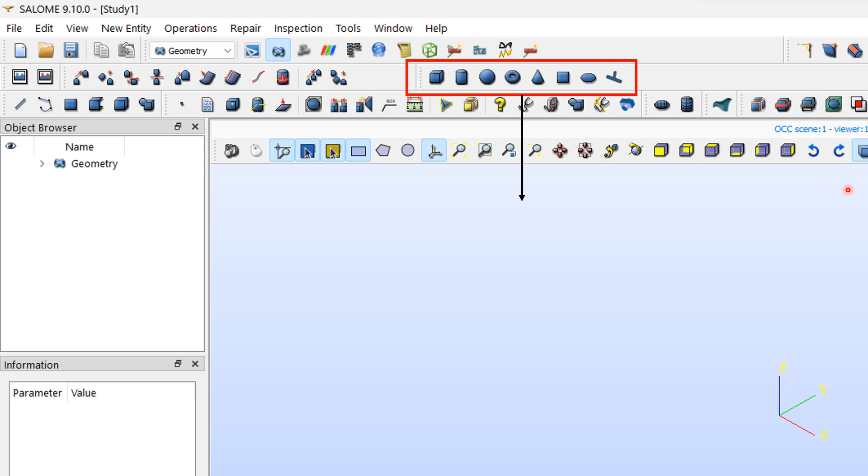You can also select primitives from the primitives toolbar, which is usually located at the top of the geometry module. So, from the primitives toolbar, I will select the first tool, box. Clicking on it will open the box property panel. We have two algorithms to create a box. Here I will select the first one.

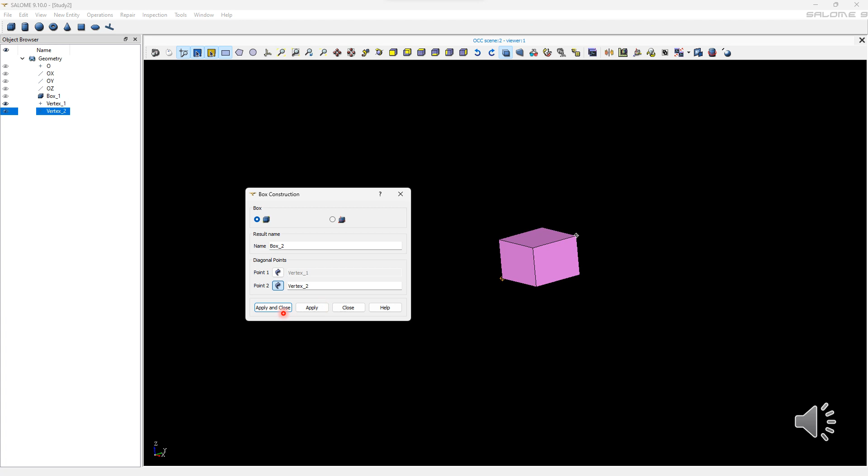In the first algorithm, a box can be created by selecting 2 points. For point 1, I will select this vertex from the view, and for point 2, I will select this vertex from the view. By default, by selecting the points, the box is created. We need to select diagonal points, and now click the apply and close button, and you can see that the box is created.

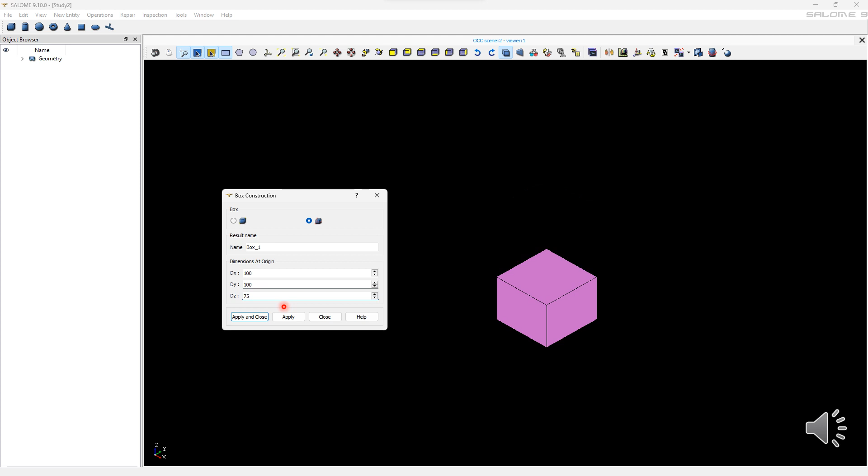In this case, I will select algorithm 2. In this algorithm, we need to define distances in x, y and z direction to create the box. By default, the box is created with the distances 200. Now I will set the x distance to 100, y distance to 100 and z distance to 75, and click this apply button to save the changes.

The next one is cylinder, and to create a cylinder we have two algorithms. In the first algorithm we need to select a base point, and we have the option to set the angle as well. Here I have selected the base point from the object browser, and I'll select OZ vector and click this apply button, and with the radius of 100 and the height of 300, the cylinder is created.

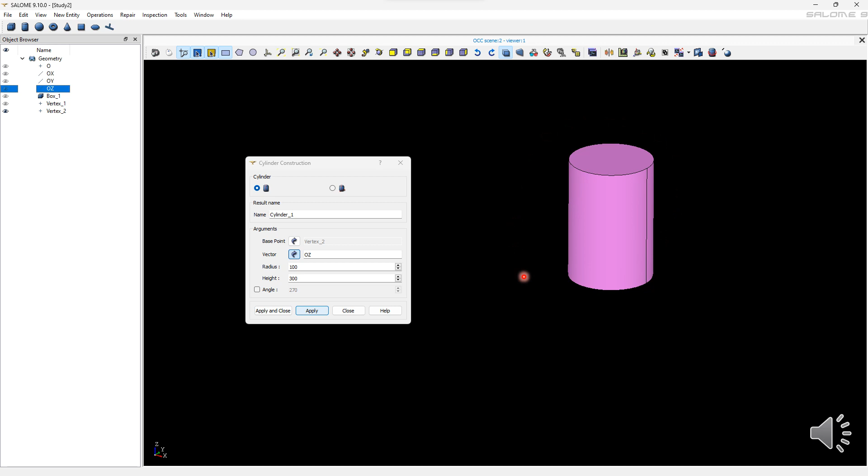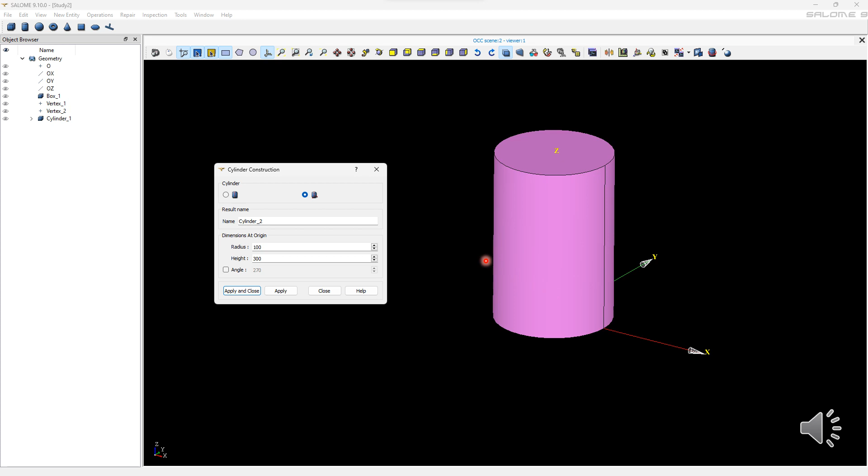In this case, we have the trihedron. The base point is taken as the trihedron; I mean, the cylinder base point will be the origin of the trihedron. So dimensions are taken from the trihedron. I'll set the angle to 270 in this case and click this apply button, and you can see that the cylinder is created with an angle.

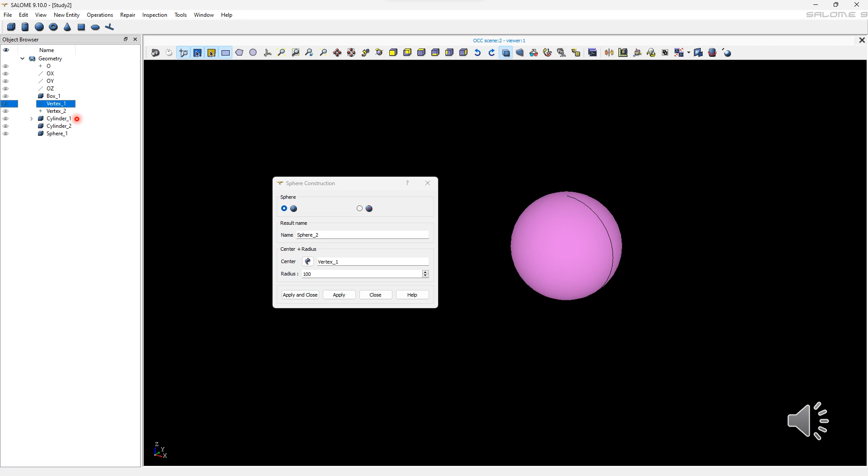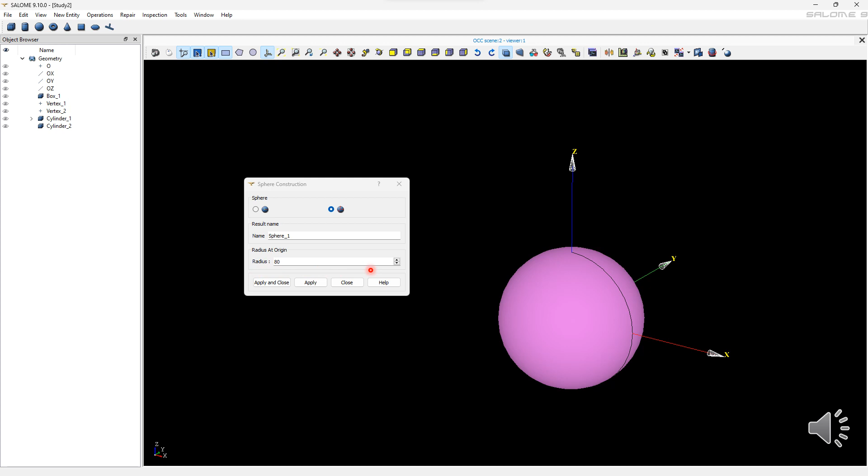The next one is sphere, and to create a sphere we have two algorithms. As usual we need to select the center point; here I'll select it from the object browser and click this apply and close button, and you can see the sphere is created. In the second algorithm, the sphere will be created at the origin. I will set the radius to 80 and click the apply button, and the sphere is created.

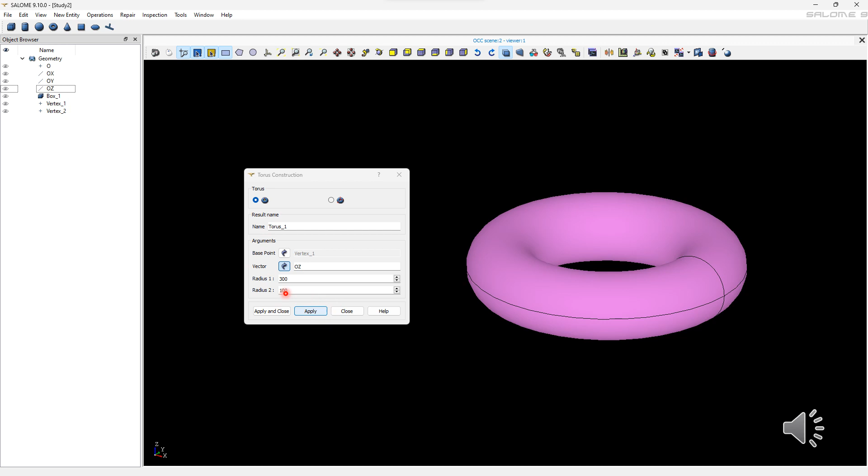The next one is torus, and to create a torus we have two algorithms. In the first algorithm we need to select a base point and vector and set radius 1 and radius 2. For the base point, I have selected vertex 1 from the object browser, and I set OZ vector, and for radius 1 and radius 2, I'll set 300 and 100 and click this apply button.

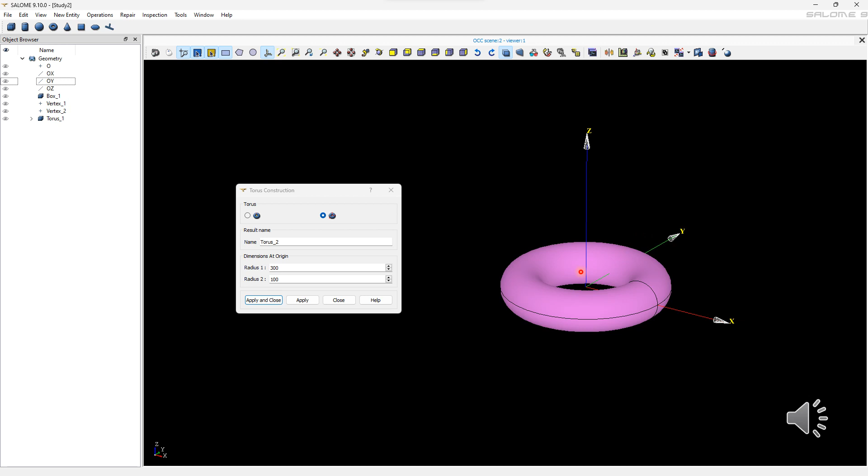In the second algorithm, dimensions are taken at the origin of the trihedron, so there is no need to select a center point. The center point will be taken as the origin. Here I'll change radius 2 to 25 and click this apply button, and here the torus is created.

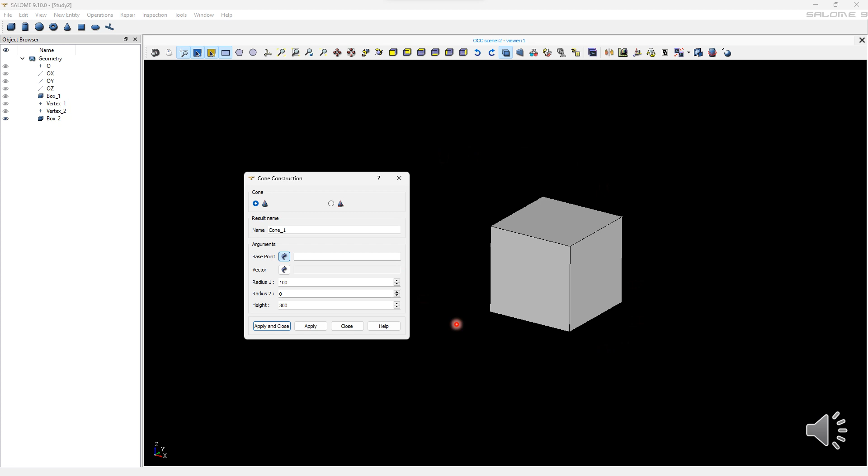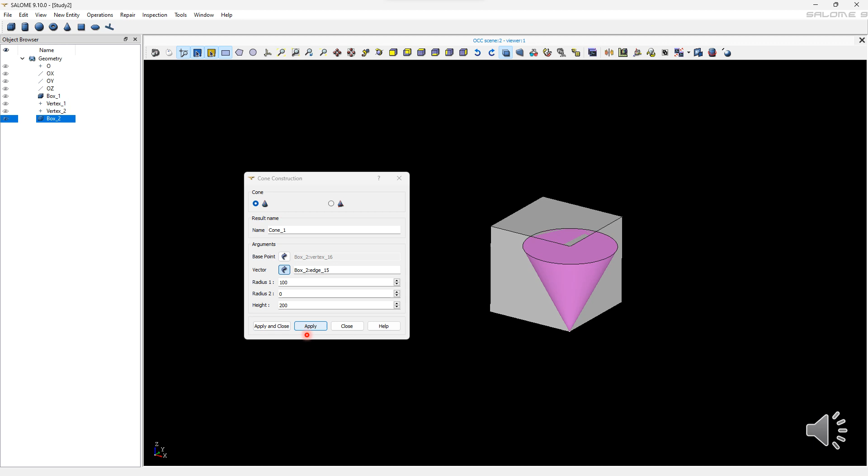The next one is cone, and to create a cone we have two algorithms. In this case I want to create a cone based on the object. For that I will select this vertex, and the vector will be this object's normal, and you can see that the cone is created here. I want to change the height of the cone to 200 and click the apply button to save the changes, and you can see the cone is created.

In this case I will set radius 2 to 50, and you can see here that radius 1 is 100 and radius 2 is 50. Now I'll click the apply button to save the changes.

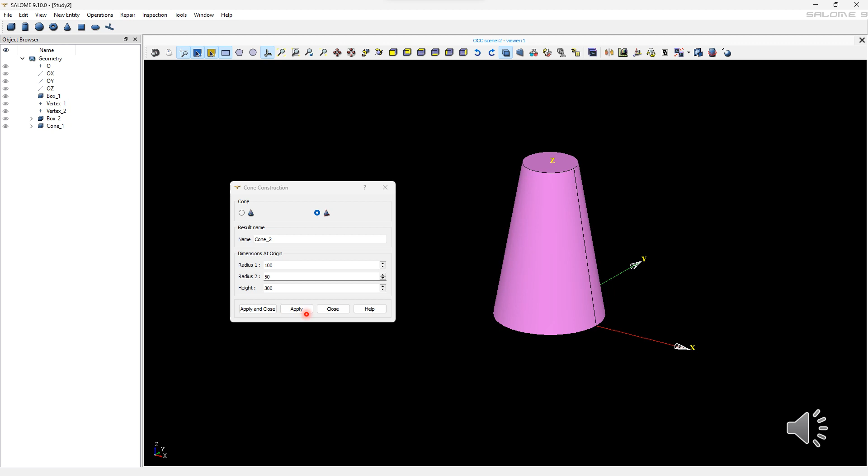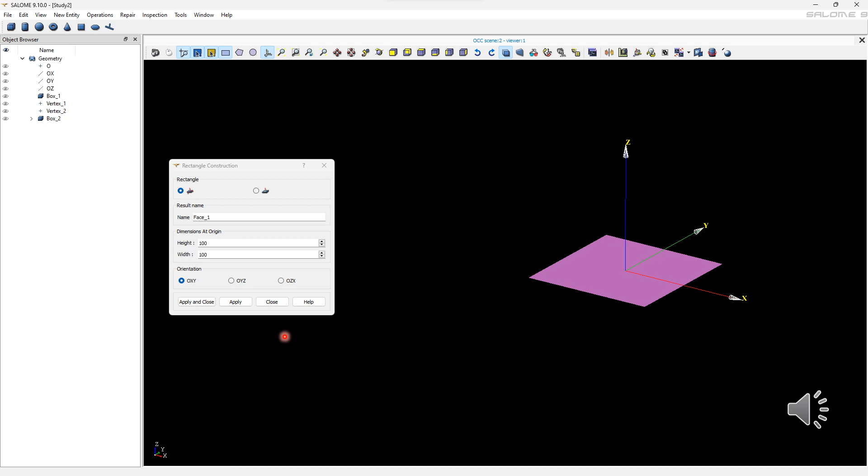The next one is rectangular face, and to create it we have two algorithms. In the first algorithm we need to specify the height and width of the rectangle, and we can change the orientation. Now I'll click this apply and close button. So OZX, the rectangle is created in OZ vector.

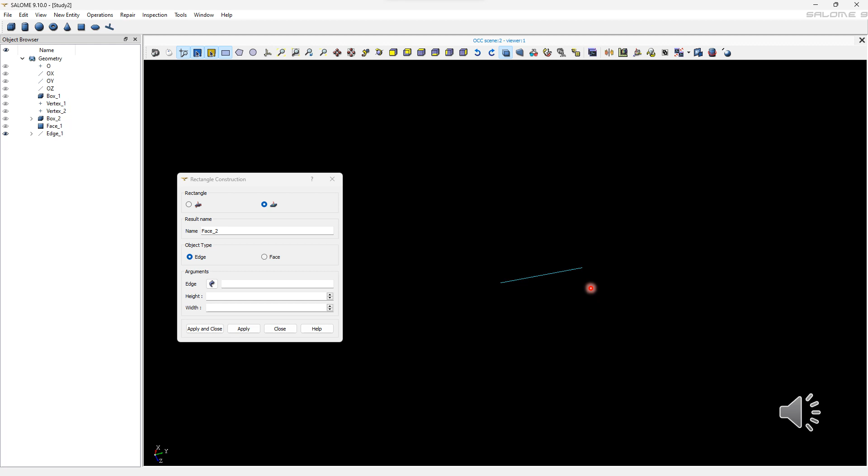Now, to create a rectangle in the second algorithm we have two types. In the first type we need to select an edge to create a rectangle. Here from the view I will select this edge, and I will set the height of the rectangle to 200 and the width to 500, and you can see that the rectangle is created. Now click the apply button to save the changes.

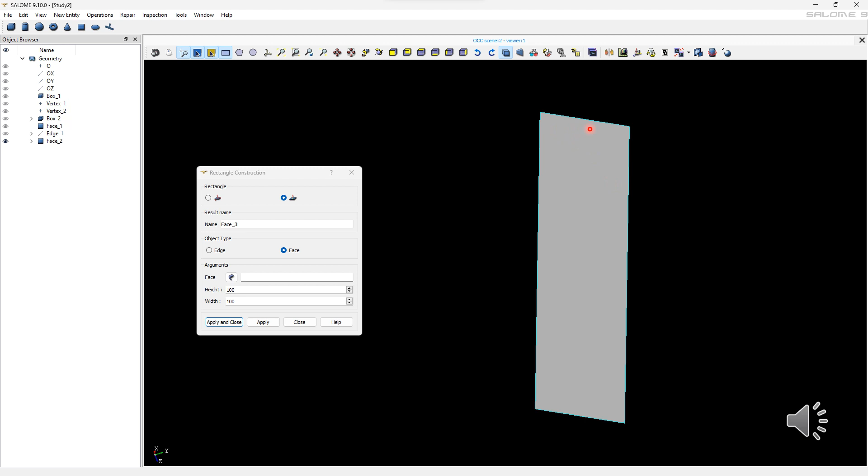The next type is face. Here we need to select a face. I will select this face, and the rectangle is created here with a height of 200 and a width of 100, based on the face shape. Now click the apply button to save the changes.

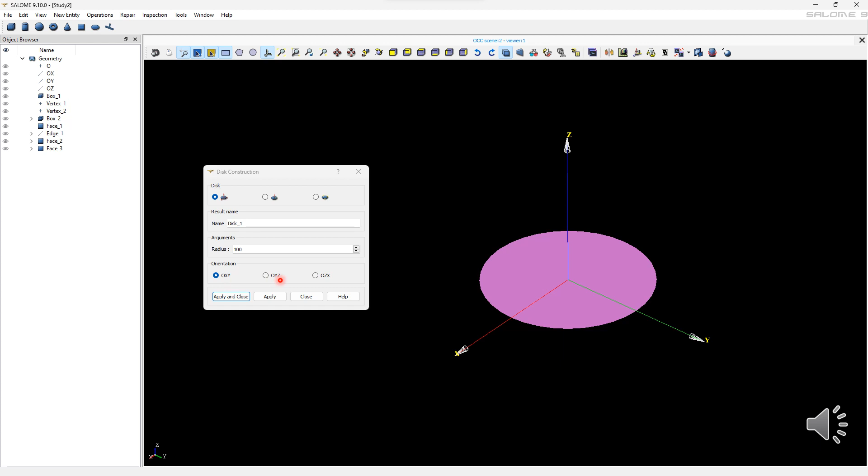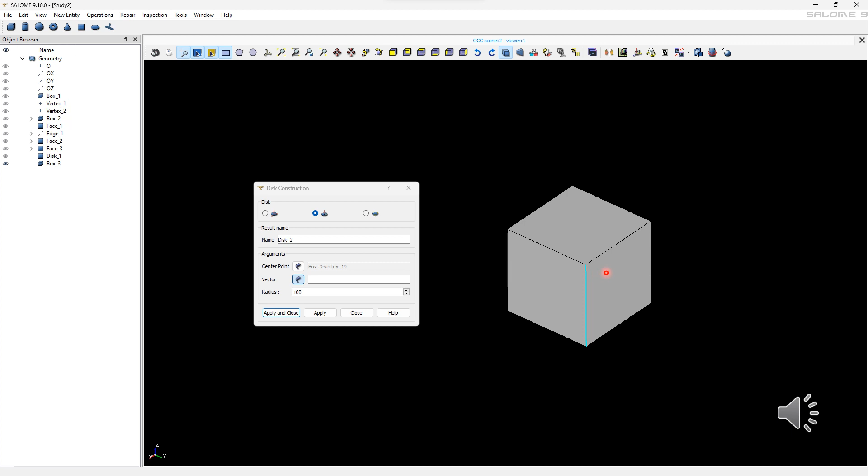The next one is disk. To create a disk in algorithm 1 we need to set the radius, and we have the option to choose the orientation. Here I'll change the radius of the disk to 150 and click the apply button to save the changes. In the second algorithm we need to select a center point and set a vector to create the disk. I will select this vertex from this object and set the base vector, and here the disk is created.

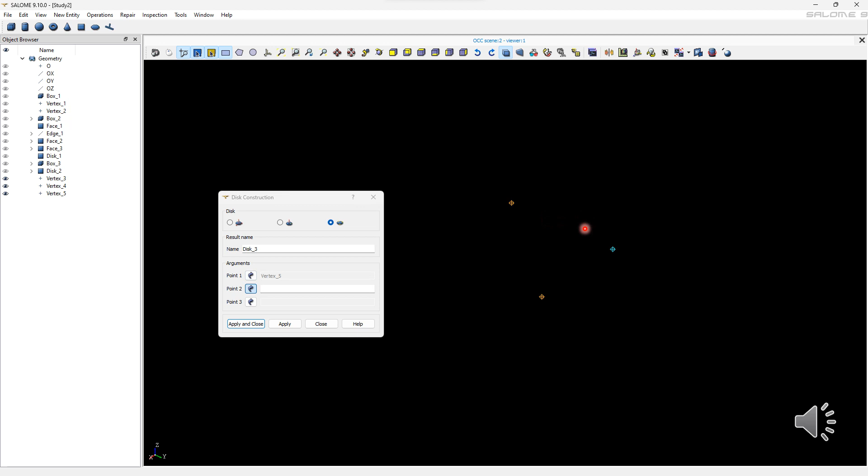In the third algorithm we can create a disk by selecting 3 points. For the first point I will select this point, and this is the second and third, and you can see the disk is created based on the 3 points. Click the apply button to save the changes.

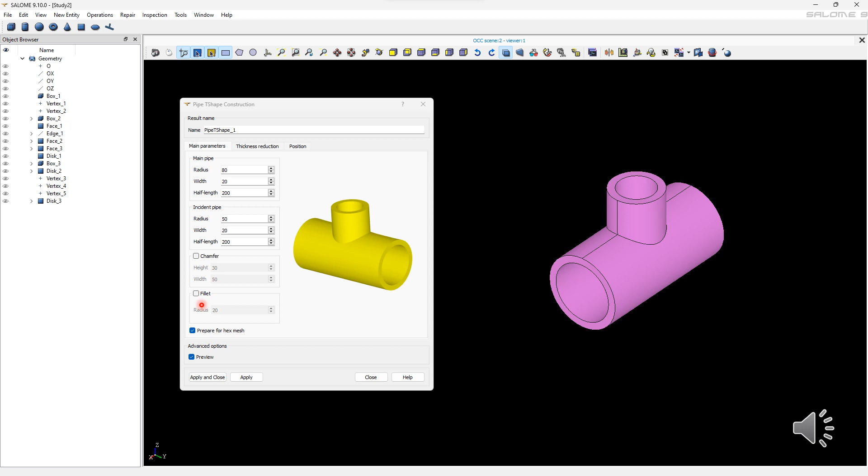The next one is pipe T shape. To create it we need to set some changes. Here I activated the chamfer, and I changed the height of the chamfer to 30. In this case I will activate fillet. Here I change it to thickness reduction. I activated left thickness reduction, and the right one, and you can change the parameters, and this is the pipe thickness.